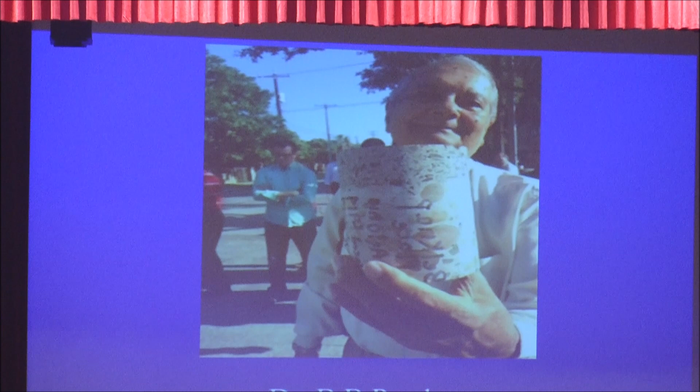To have pavement engineering atmosphere in this hall, we must remember the father of pavement engineering in India, Dr. ... Sir, you have left with us world-class design guidelines for flexible and rigid pavements. Sir, we remain always grateful to you. And for information to all of you, IRC 37 2018 is the last creation of Dr. ...

Outline of this presentation. First is purpose of this workshop, progression of IRC 37, guideline for design of flexible pavement, discussion on each section of IRC 37 2018, selection criteria of pavement layer combinations, long life or perpetual pavement, conclusions and way forward.

Purpose of this workshop. While drafting IRC 37 2018, it has been tried to explain the basis of each input so that it will not remain a black box for the practicing professional pavement design engineers. As secretary sir told, it is a two-way interaction to elaborate the thick and thin lines, that is provisions of IRC 37 2018, so that after this workshop we can design flexible pavement more professionally, with better understanding and with more confidence.

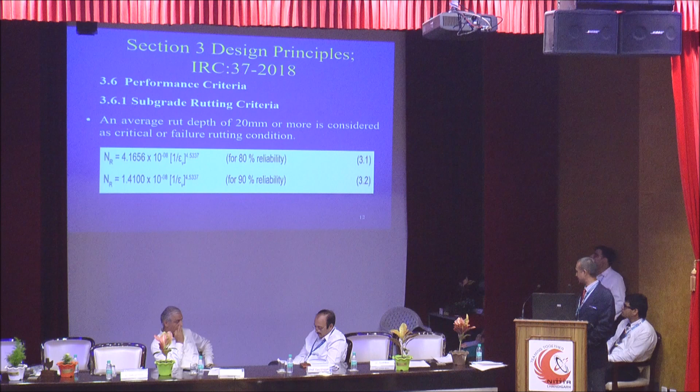Though we are doing the design considering this fatigue equation with Vbe, we are never calculating and validating whether this Vbe is achieved in the actual DBM design or not. Vbe is simply VMA minus Va, voids in mineral aggregate minus volume of air voids. People are manipulating this parameter. So be careful. You must check the Vbe calculation while doing the mix design of the DBM bottom layer. Vbe is simply VMA minus Va.

Performance: fatigue cracking of CTB. There are two checks we generally do for CTB layer thickness calculation. One is fatigue cracking. And here, mind it, epsilon T, the horizontal tensile strain at bottom of the CTB layer, is taken in micro strain in this equation.

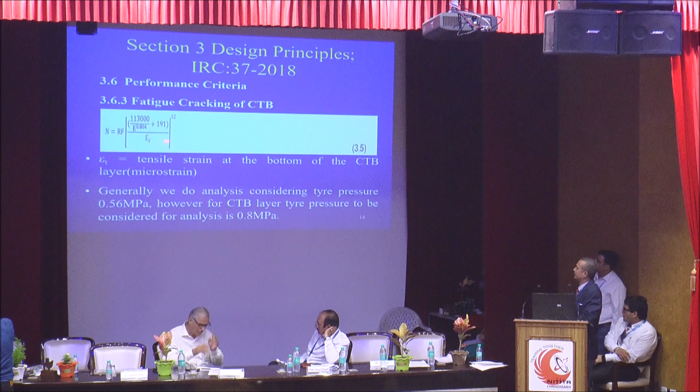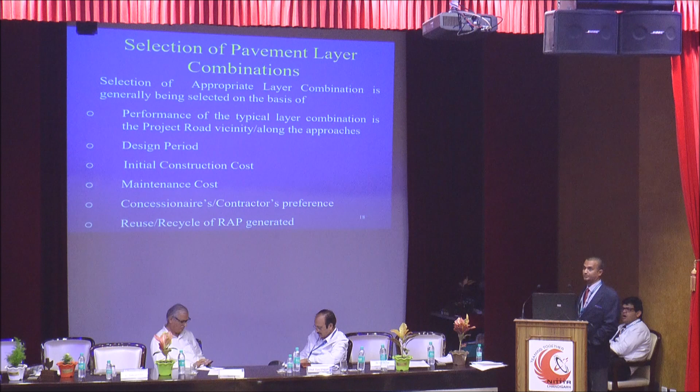And concessionaire and contractor preference. What their planning and thoughts are, we must consider while selecting the appropriate pavement layer. Reuse, recycle of RAP generation. That means if in our project there is some RAP generation, we must reuse it. Don't waste. Availability of material at economic haulage, use of locally available materials. We always encourage use of locally available material and material availability at economic haulage.

Environmental legal regulation. That means if in an urban area HMP is banned, then we must think of some cold mix bituminous layer. Availability of machinery and plant. If we are thinking of CTB and CTSB as layers, but we do not have a purpose-built soil stabilizer, we don't go for it, because we use the optimum pavement layer combination having purpose-built machinery and plants.

If we go for RAP use of more than 30% in DBM mix, we must have a double barrel HMP plant. We don't do things with a Jugaad system, otherwise our pavement will fail prematurely and everybody will blame us. And then extra loading, design traffic, subgrade CBR, rainfall. If we are designing the pavement in Cochin, then we must go for more granular layers, having a separate GSB filter layer and GSB drainage layer. So these are all the things we have to holistically think about before selecting an appropriate pavement layer combination.

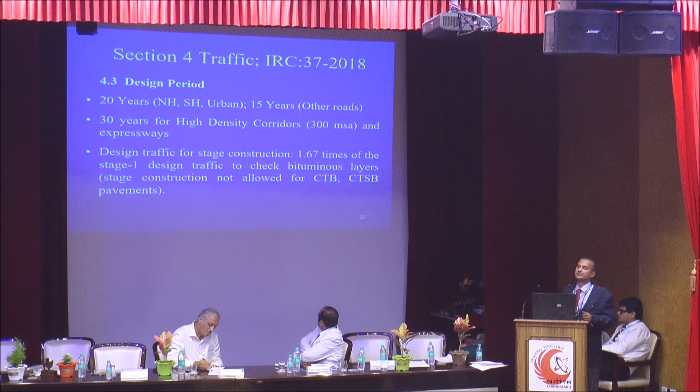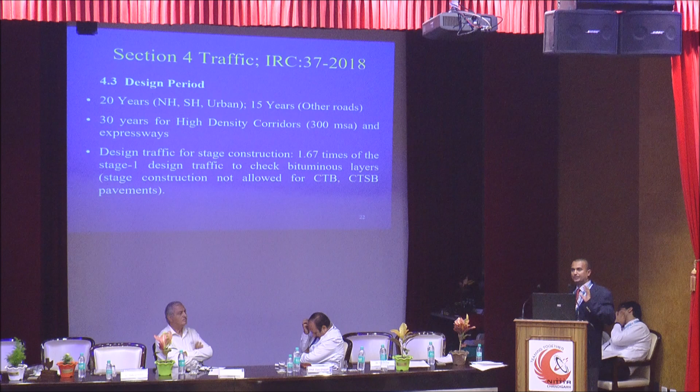Design period: 20 years for NH and SH urban, 15 years for other roads, 30 years for high density corridors of 300 MSA and more, and expressways. This new thing has come. Design traffic for stage construction is 1.67 times the stage 1 design traffic. That means, dear friend, earlier we were doing stage construction with bituminous surfacing for a 10-year design period and planning the overlay after 10 years. But to have some remaining life prior to overlay, this new thing has come in our guideline, so that the existing bituminous layer will not exhaust its entire stage 1 life prior to its rehabilitation.

Vehicle damage factor: IRC 37 strongly recommends taking the realistic prevailing VDF based on axle load survey. Please do that, because designers generally manipulate this VDF. They are under-designing the pavement to save cost. With the new Gazette notification, we have revised the indicative VDF in our guideline. Now it is 5.

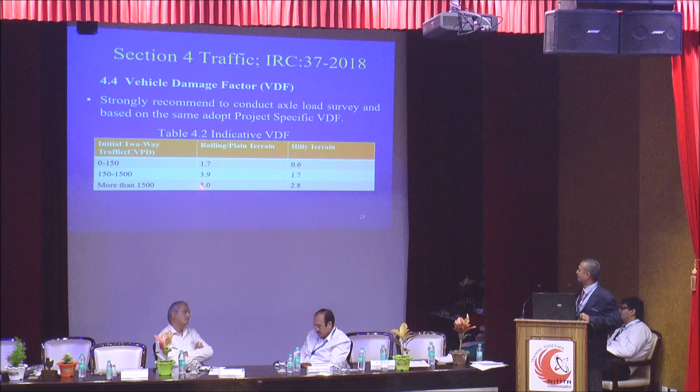Section 6, subgrade: the difference between the bottom of subgrade level and the level of water table or high flood level should generally be not less than 1 meter. If there is an existing road and no overtopping is reported, it has to be 0.6 meter. Laboratory CBR test: though IRC 37 recommends static compaction, as we are designing the pavement considering the effective resilient modulus of subgrade, obtained by correlating CBR with MR value, and that correlation itself was developed under dynamic loading conditions, the laboratory CBR test can be either static or dynamic, it doesn't matter.

Minimum surcharge weight, we have to keep 5 kg. It is always a dispute in the field. Rationally it has to be the equivalent surcharge weight of the pavement layers over the subgrade, which comes to around 20 to 25 kg depending upon the pavement layer thicknesses. But to have some factor of safety, we take minimum 5 kg. Minimum 5 kg will give some factor of safety.

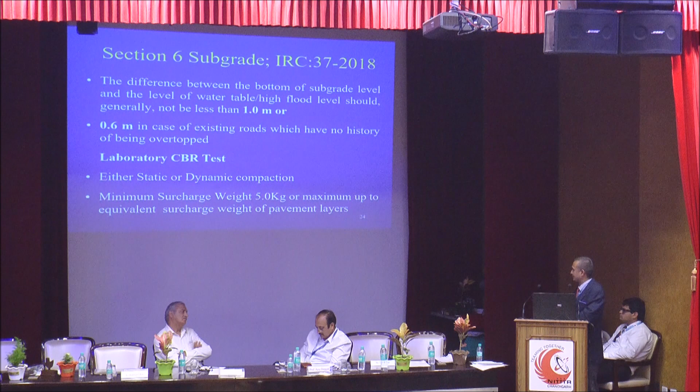This design is based on effective resilient modulus, calculated using effective subgrade CBR, considering 4 days soaked CBR at 97% MDD of the 500 mm select subgrade and 4 days soaked CBR at 95% MDD of the in situ embankment soil, 500 mm layer below subgrade. That means with this 2-layer system, we calculate the equivalent single layer system. This input is due to LEA Associates. While we were doing the design in 2000 in Nagpur, Dr. S.K. Rao, who was with LEA Associates, asked Professor Pandey, a very peculiar professor, if we put 10% CBR material on 2% CBR embankment soil, is it rational? Then Dr. Pandey thought it over, and with the help of Amarnath Reddy, he developed this model.

Effective subgrade CBR, this is deflection. We calculate the surface deflection of the 2-layer system, and then we calculate E equivalent of a single layer. The effective subgrade CBR should be more than 8% for roads estimated to carry more than 450 commercial vehicles per day. This is the correlation developed with dynamic conditions. For the purpose of design, the effective resilient modulus shall be limited to a maximum value of 100 MPa. In so many projects in Rajasthan, designers have taken even 22%, 24%, 28% CBR. So they have exploited IRC 37 like anything. So now it has been restricted to 100 MPa. This is the Poisson ratio value.

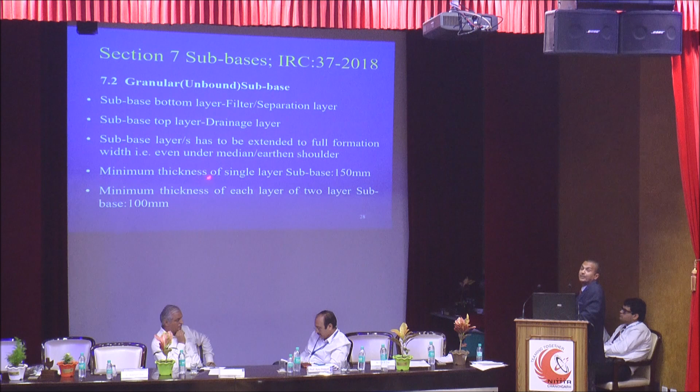Granular unbound subbase: filter layer, separation layer is the bottom layer, top layer is drainage layer. Both subbase layers have to be extended; in some typical cross sections you will see only one layer is extended. So both of the subbase layers have to be extended to full formation width, that is even under median and earthen shoulder. Minimum thickness of single layer subbase is 150 mm.

Minimum thickness of each layer of 2 layer subbase is 100 mm. If total subbase thickness is less than or equal to 200 mm, it has to be laid in single layer, and MORTH Table 400-1 grading 5 or 6 has to be adopted. If total subbase thickness is more than 200 mm, MORTH table grading 1 or 2 for lower subbase and grading 3 or 4 for upper subbase layer has to be adopted.

Calculation of resilient modulus of granular layer: this is the well-known equation, and this is the thickness of granular layer. If it is single layer subbase, then it is the single layer subbase. If we have granular base and subbase both, then it is the total thickness of base and subbase. This is the effective subgrade modulus.

Cement treated subbase, CTSB layer. As we all know, with CTB layer the permeability is getting reduced. So we are now recommending grading 4, Table 400-1 of MORTH, so that neither strength nor drainage is compromised while using CTSB layer.

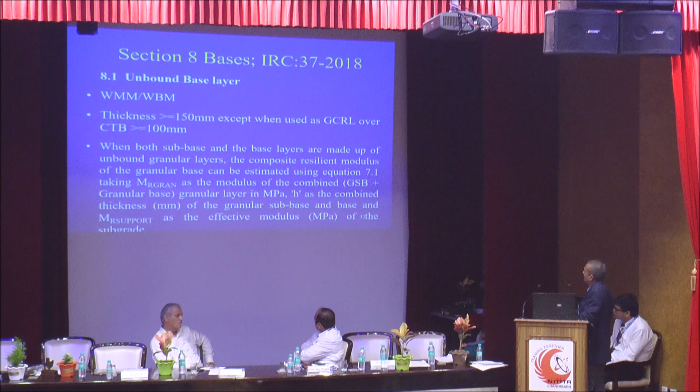For the granular base placed on CTSB layer, the resilient modulus may be taken as 300 MPa if it is natural gravel treated CTSB. If it is crushed rock treated CTSB, then we have to take 350 MPa.

Now one new thing has come, geosynthetic reinforced granular base and subbase. Dear friends, at the 2nd and 3rd August Goa midterm IRC council meeting, IRC SP 59 geosynthetic guidelines are going to be published. So be careful while doing the design with geosynthetic reinforced subbase and base. And these are the provisions in IRC 37:2018.

Case 1, over subgrade only geosynthetic reinforced subbase is there. Then this is the equation we use to calculate resilient modulus of subbase layer. Over GSB only geosynthetic reinforced base, then we use this equation to calculate reinforced base resilient modulus. This LCR or MIF, layer coefficient ratio or modulus improvement factor,

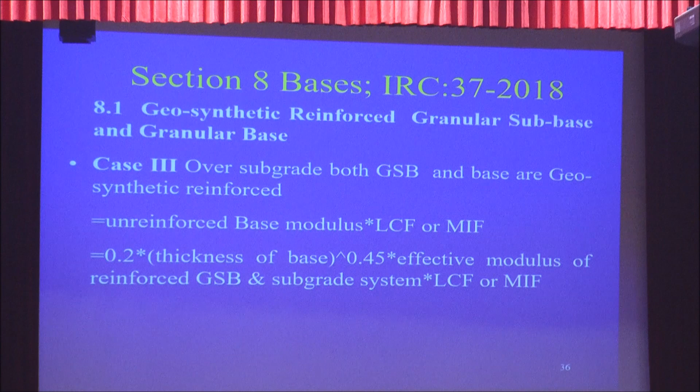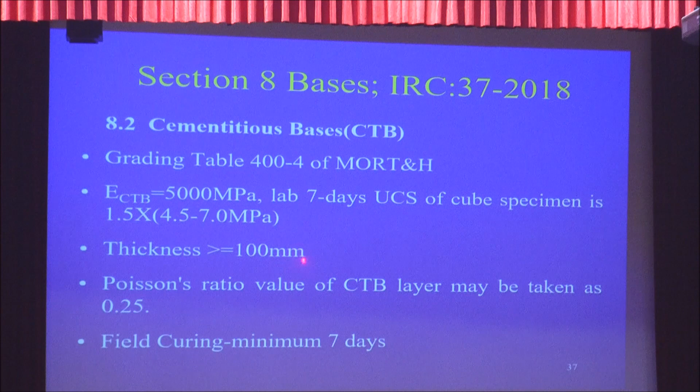Over subgrade, both GSB and base are geosynthetically reinforced, and we use this equation to calculate the effective composite resilient modulus of reinforced base and subbase. Cementitious bases, CTB grading is Table 400-4. We take the resilient modulus 5000 MPa, lab 7-day UCS cubical specimen in this range, thickness must be greater than or equal to 100 mm. Field curing we have to do for minimum 7 days.

Flexural strength, modulus of rupture of CTB material. See, there are three terms. Don't get confused. One is modulus of elasticity or Young's modulus, which we were taught in our strength of materials lecture in engineering. It is axial stress by strain, E. The second term is flexural modulus and flexural strength, that means bending stress by strain.

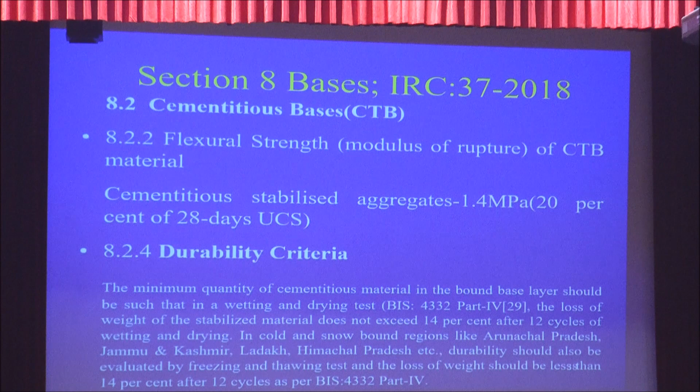And resilient modulus is deviator stress divided by recoverable strain, because our pavement is viscoelastic. So we always have some elastic recoverable and plastic permanent strain. For CTB, one has to do durability checking also.

Crack relief layer, its thickness has to be greater than or equal to 100 mm and resilient modulus 450 MPa. And SAMI, stress absorbing membrane interlayer. It is nothing but spreading of a prime coat like quantity of modified bitumen blended with some coarse aggregate. Sorry.

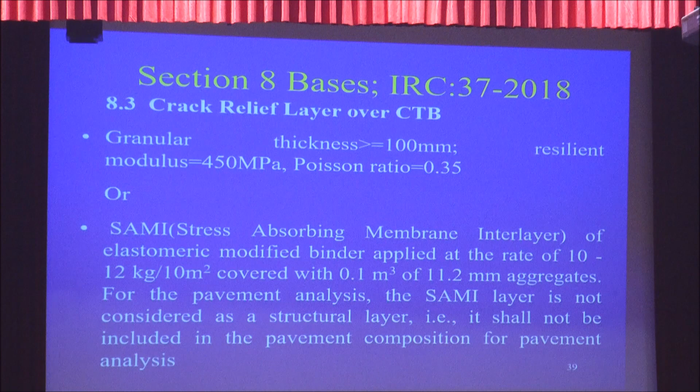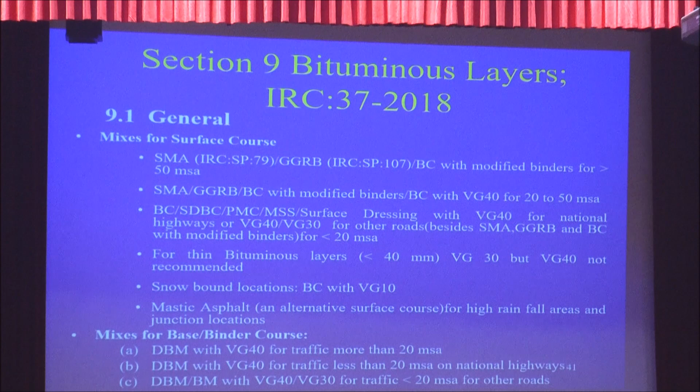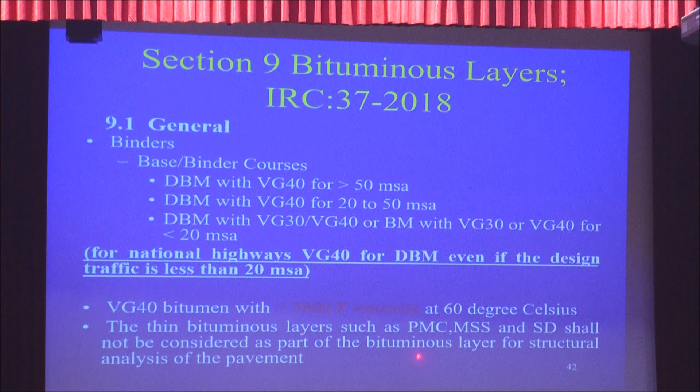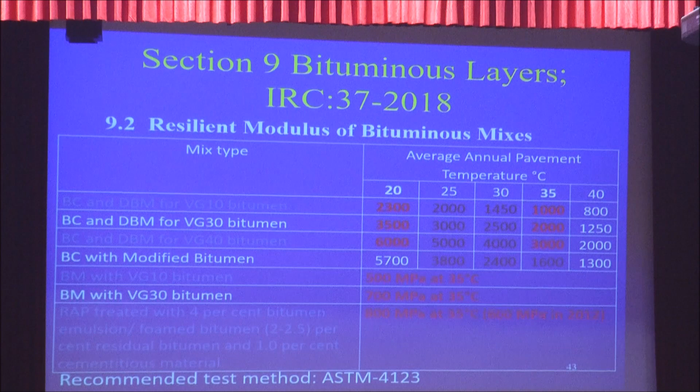The thin bituminous layers, PMC, PS, MSS and SD, shall not be considered as part of the bituminous layer for structural analysis. One more thing, resilient modulus of bituminous mixes. That means for the resilient modulus, we must assign the modulus of the surface layer the same as that of the DBM layer. Because in the lab it is less, but practically it is more. It is less in the lab due to larger recoverable strain.

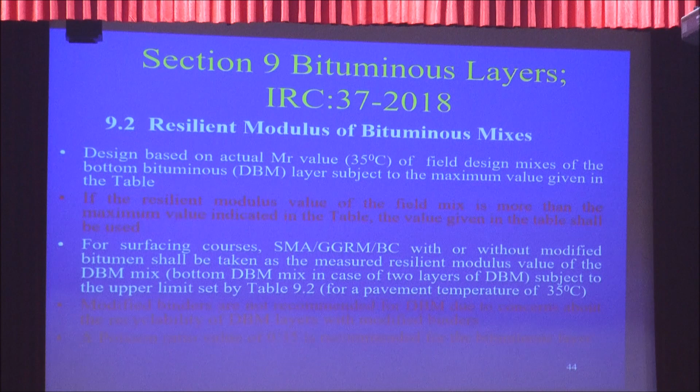The modulus we select corresponding to 35 degree temperature, annual average pavement temperature. In the field we calculate resilient modulus with ITS. Now the mix volumetrics of the bottommost DBM layer. Case 1.

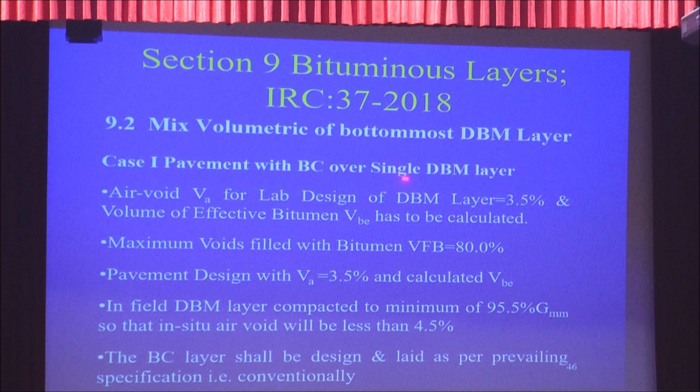Pavement with BC over more than one DBM layer: air void for lab design of bottommost DBM layer 3%. Volume of effective bitumen calculated. Pavement design VA 3%, with calculated VBE. In the field we have to compact to less than or equal to 4% in situ air void. The BC layer and DBM layers other than the bottommost DBM layer shall be designed and laid as per prevailing specification conventionally.

Even in case the parameters indicated above for rich bottom mixes are not achievable for any reason, the actual air void achieved and corresponding effective binder volume are to be used for estimation of fatigue life in pavement design. And the minimum thickness of bituminous layer for traffic exceeding 20 MSA for pavement having CTB layer must be more than 100 mm.